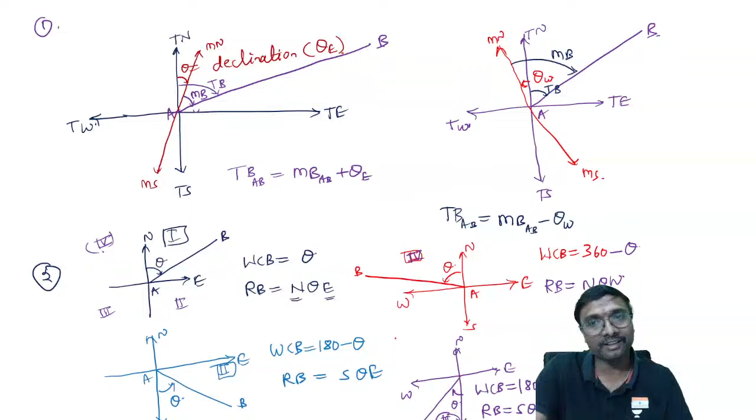So this first class is over already. The missing slides I'll try to add from the video, don't worry. The second class we also did yesterday. If we could have done the first class fully, today we would be doing the live test. Actually, the first class did not happen properly. Chapter 4, leveling, gets over, is it not? So up to that point it gets over, right?

Now we'll be going for which one? Part 3, surveying part 3, you can say. Which chapter? The next chapter, chapter 5, trigonometric leveling, right? Shall I go for this? This is your first slide, let us say. This is trigonometric leveling, if you just observe, right?

So tomorrow at 4:30 p.m., same time, right? Tomorrow at the same time, 4:30 p.m., we'll be doing chapter 5, trigonometric leveling, right? Once this trigonometric leveling is over, we will be having the live test on this, right?

After this survey, shall I go with any other subject, or shall I do all mixed tests continuously up to the end? For survey I'll take one test. After surveying is over, shall I go with another subject's quick revision and live test, or shall I go for all-subjects mixed live tests continuously? Which one should I do?

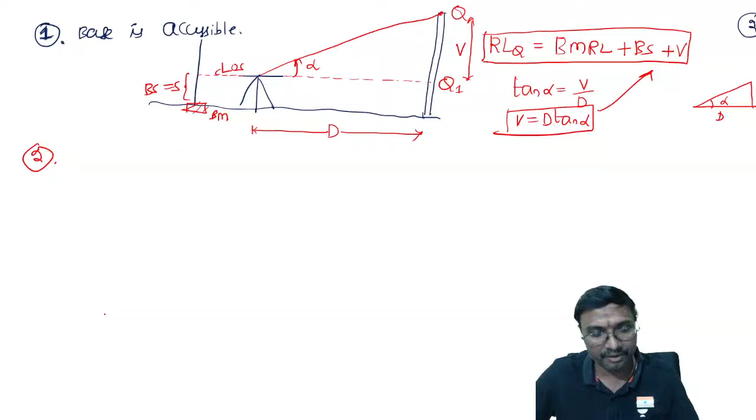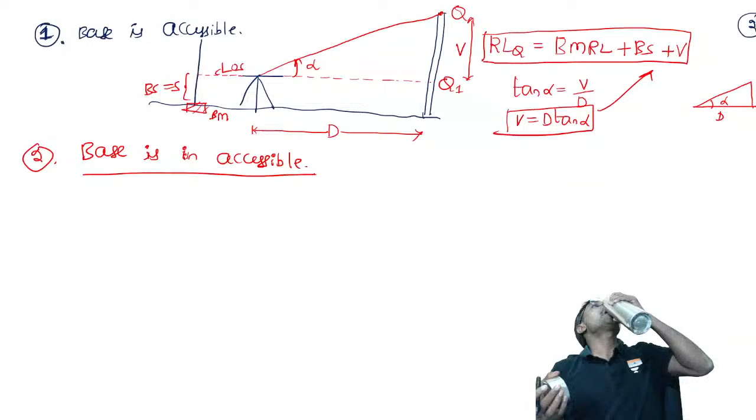That is when base is accessible. So when base is inaccessible, what do we need to do? When base is inaccessible, what is it you have to go for? Under this also there are two conditions. The first: instrument axes are at the same level.

Both instrument axes means the observation axes are at the same level. What is the meaning of instrument axes at the same level? This is your building, or your tower, present at this place. Now this is your Q point. This is your normal ground level.

So can you measure this horizontal distance exactly, or is it impossible? It is impossible to measure this horizontal distance. Now you are having this instrument here. This is the instrument, and this is the horizontal level, or horizontal axis, of this instrument.

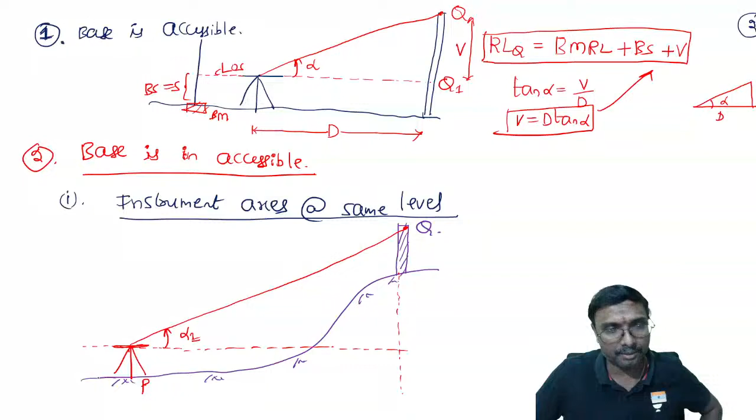So can you get any visibility here? No. But we can observe the top of this building Q. You are getting the angle of elevation alpha 1 from this instrument P. So only one instrument we have to use, or two? Two instruments we have to use.

The next instrument we are keeping here at the same level. So the eye level of this instrument must be the same. Up to this point we will be having alpha 2. This is your A point, and this is your B point.

Now which type of reading will be taken by both on this benchmark? Both will give the same reading, since both lines of sight are at the same level. Only one reading will be available, that is your back sight. Between this instrument and this instrument, we know the distance b. Do you have any problem in measuring this small b?

We don't have any problem in measuring this small b, but this capital D is not possible to measure. That is why we are going for these steps. Okay, this capital D is not possible to measure, you can say, right?

Now coming to this, this is your V, from here to here. This is your V, you can say. This is your Q dash, whatever it is. Is it clear? The diagram is clear, everyone?

Both instrument at P and instrument at Q, the height of this line of sight must be kept at the same elevation. That line of sight must be kept at the same elevation, right? Now shall we move to the next? How will the line of sight be kept at the same elevation?

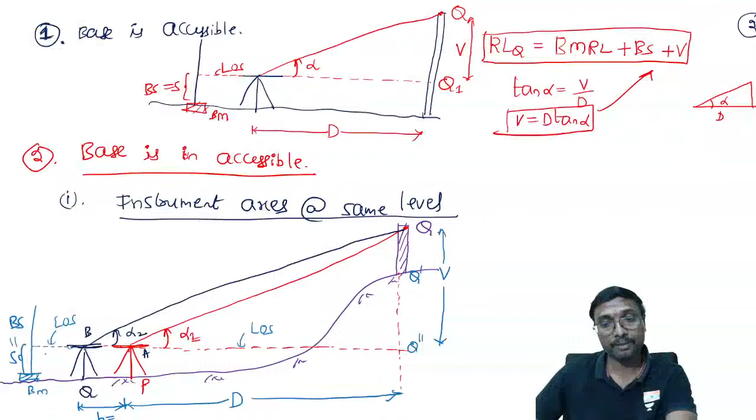The reduced level of Q will be equal to the reduced level of the benchmark plus backsight. Adding these gives the reduced level of the line of sight. From line of sight to the top, the distance is V, so plus this V. That is how you get the reduced level of the top of this tower. Is it clear now, everyone?

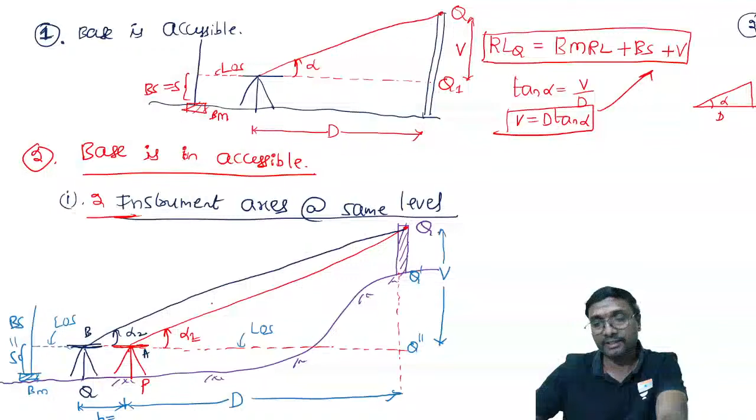Under this base not accessible condition, the two instrument axes are at the same level. Is it clear? Shall I move to the next?

So under this, base inaccessible, first condition, right? Second one, can we go for two instrument axes, right? Two instrument axes at which one? This is same level or different level? Yeah, you form the diagram in a question in the examination accordingly, right? You form the diagram. From the diagram you get it accordingly, right? फटाफट धनाधन diagram draw करके trigonometry principle apply करके solve करना है, right?

That is better, because if you try to remember this formula, you cannot remember this formula. It is very difficult to remember this formula. You can say it is almost impossible to remember this formula. You have to be careful, right?

Two instrument axes at which one? This is a different elevation. This is different levels. Level is nothing but your elevation only. Because all formulas look similar only, right? So there is a possibility that confusion will occur.

Yes, hi Pravalika. Two instrument axes at the different level means, right? This is the one you are having. One second. Just try to erase this.

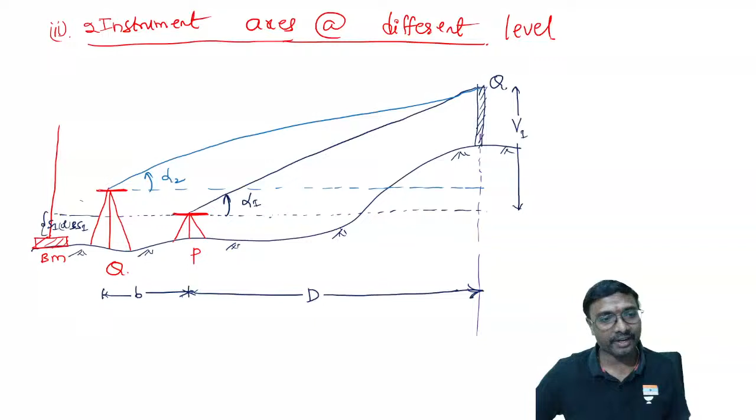Now, similarly, when you are taking this second instrument, this is the line of sight of this second instrument station. If you just observe, this is your alpha 2, you can say. Let us assume it is a straight line, okay? One second.

Let us assume that is a straight line. And what happens up to this point, what is it you are having? This is your backsight 2. This is your S2, or this backsight 2, you can say, right? Now what is this one? This distance will be V2. If you just observe, this is V2, you can say, like that.

Is that clear now, everyone? Is that clear now, all of you?

So can we say this one is X and this is also that X? So now can I say that S2 minus S1 equal to V1 minus V2? Can I say that it is equal to that X or S, whatever it is? Whatever symbol you want to give for this, you can give it, if you just observe. Okay?

So now this S2 minus S1 is nothing but your S only. S you wanted to give the symbol, or X? Yes, will give the S symbol. Okay, that is better. We are habituated to do this. Deepa, good evening. Right. So S will be equal to which one?

This V1 minus this V2, right? What is that V1? If you just observe, V1 is nothing but your D tan alpha 1, minus what is that V2? You can say that is your D plus b, right? What is it you can say? That D plus b.

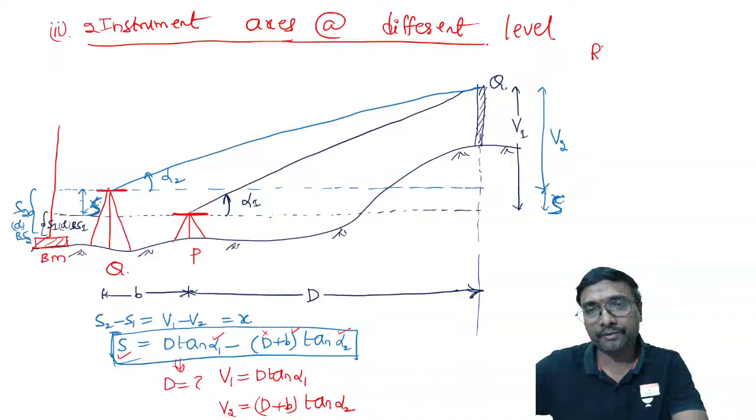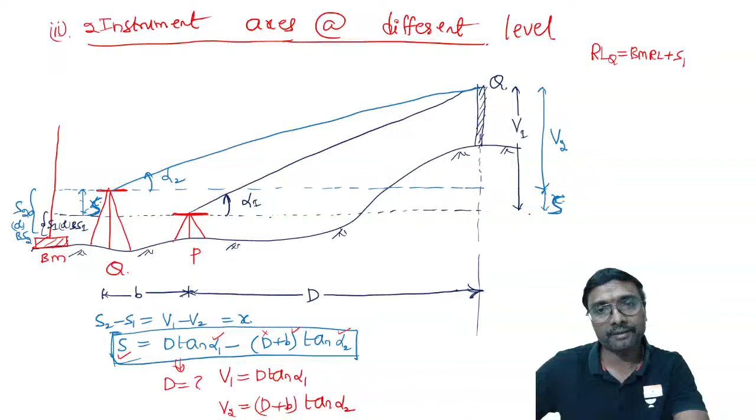Now what is that formula we can use for the reduced level of this Q? This is your benchmark reduced level plus S1, means level of line of sight, plus V1, right? Or we can also calculate it: the reduced level of Q will be equal to benchmark reduced level plus S2 plus V2. Got it now? How to get the reduced level of this top point Q?

So nowadays they started giving you questions from this one also, because everybody is preparing compass survey, chain survey, leveling and like that. In recent years, if you just observe, you find questions from this trigonometric leveling. Is it clear, everyone? So this completes your trigonometric leveling, chapter 5.

Shall I go for the next chapter? That is your chapter 6, traversing and omitted measurements. Traversing and omitted measurements.

Traversing and these omitted measurements, you can say features, right? So maximum how many measurements can we find out? During surveying, suppose we have missed some angle or some line length, or we have measured but forgot to note it. Then how can you get these missing details? Maximum 2 details only we can get. Maximum 2 details, right?

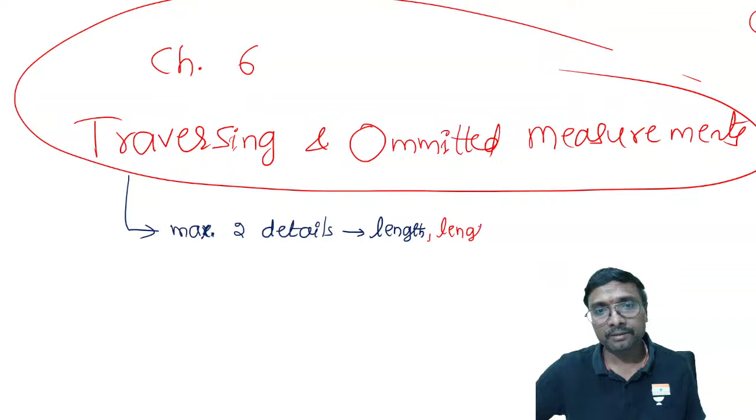So length comma length, length comma bearing, and bearing comma bearing, 2 bearings. Of which one? These are of the same or other sides. Same side 2 properties are not known, length and bearing are not known, or of other sides of the polygon: one side bearing, one side length. Like that combination, you can say features.

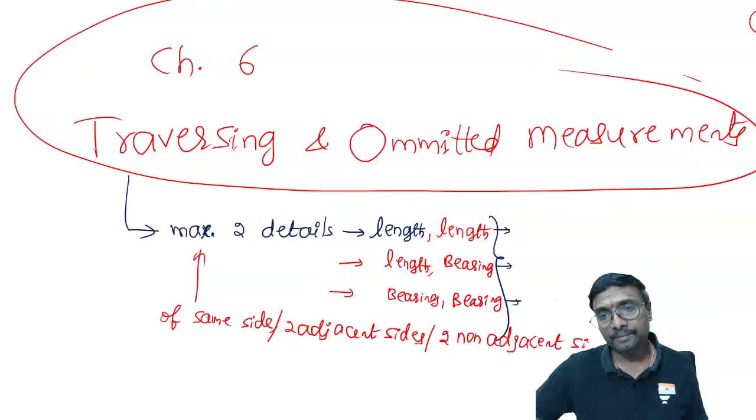Either both parameters correspond to one side, or to adjacent sides, or to non-adjacent sides. It is better I write it in that manner. The maximum 2 details will be of the same side, two adjacent sides, or two non-adjacent sides. Either way you can go for this. Is it clear?

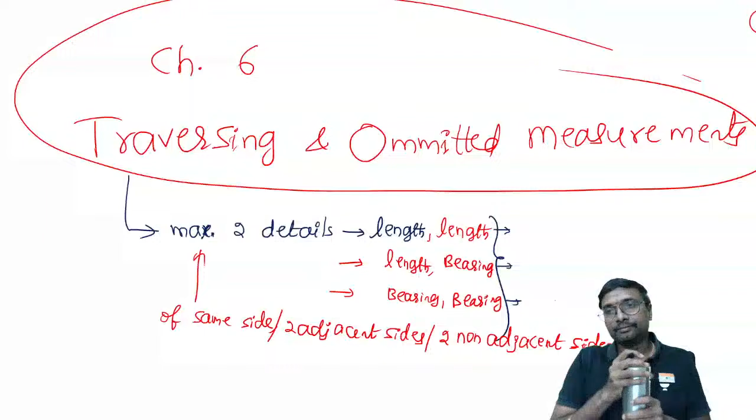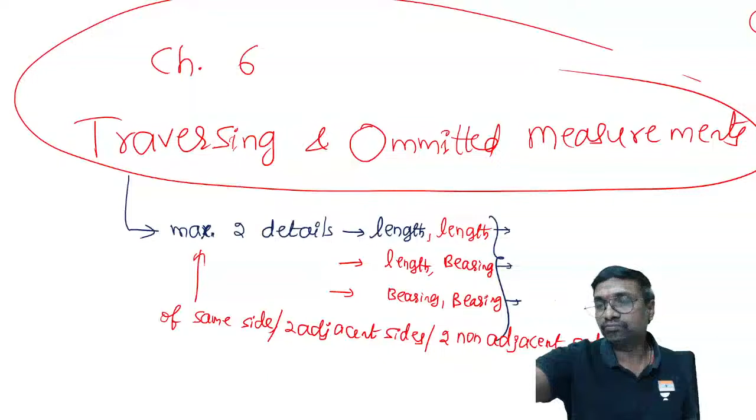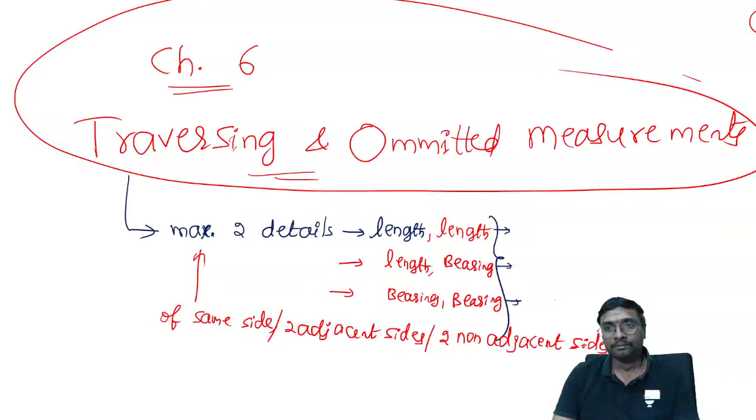Note this and tell me. Clear, everyone? Shall I move? You are not noting, na? I am waiting.

So maximum 2 details can be omitted, and those maximum 2 details we can retrieve for a closed traverse. For a closed traverse, what is the sum of the interior angles? It is (2n minus 4) into 90 degrees. In a habit, I wait while you are writing.

So what is the sum of the exterior angles? It is (2n plus 4) into 90. Here n is the number of sides of the traverse. However many sides are there, you have to consider that many sides. Is it clear? Now, what is the closing error?

Do you remember that? Seriously writing? I'm giving the PDF, don't worry. I'll be sharing the PDF, no need to worry.

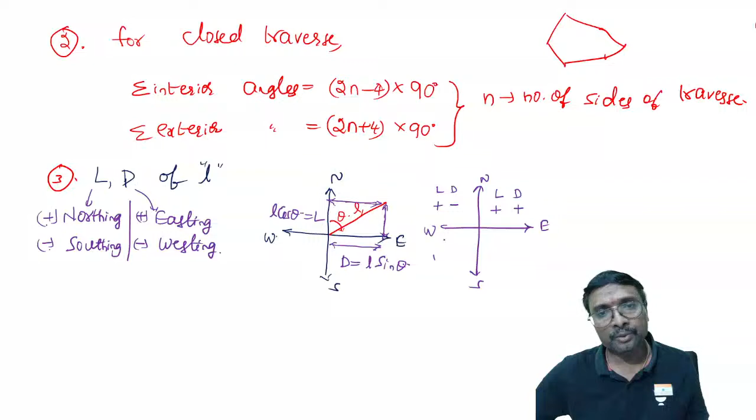Northing, easting: latitude and departure. Northing is nothing but positive latitude, and easting is also positive departure. Here in this north-west quadrant, latitude northing is positive and westing departure is negative. The next one is south-west, so latitude and departure both will be negative.

And here, latitude southing is negative and departure easting is positive. These are the sign conventions we'll be having, right? Now, closing error.

What is a closing error? Whenever a traverse is there, suppose you start from A, go to B, C, and D. Then when you join again, it is not joining to the original A. It ends at A1. So it will have an error, since it is not joining the original point. This is the error.

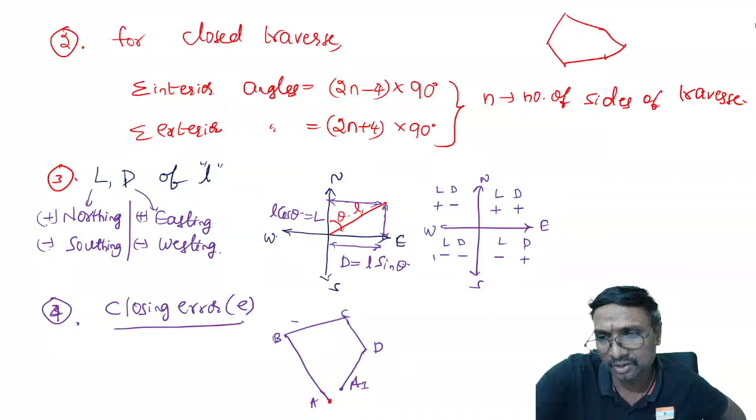Yes, we need to take the quadrantal bearings. Quadrantals, anti-clockwise you have to take it.

So here, this is your sum of departures, and this is your sum of latitudes. And this is your closing error, A to A1. So the closing error E will be equal to the square root of sum of latitudes whole square plus sum of departures whole square.

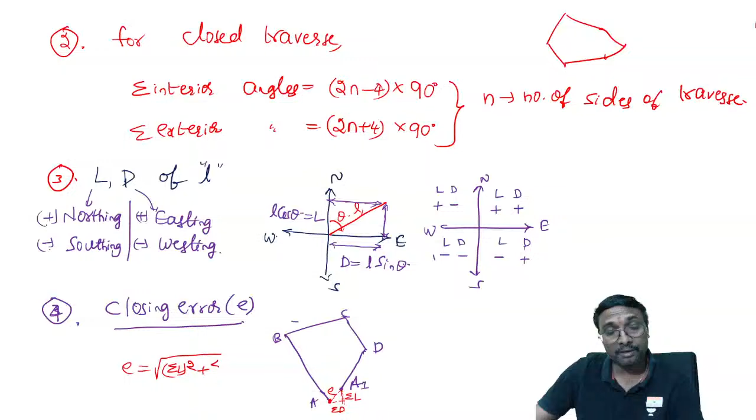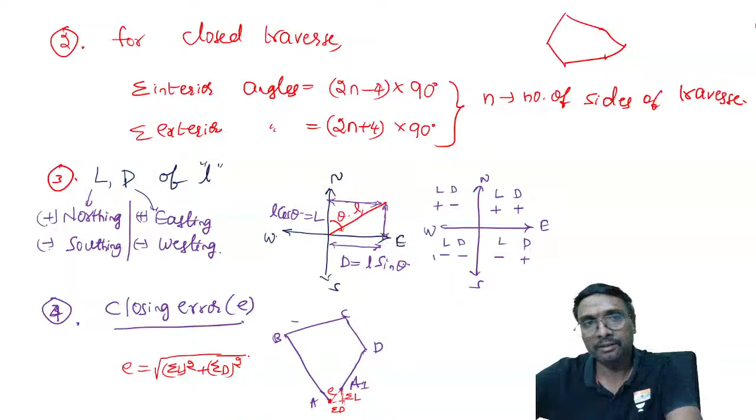That is your closing error, you can say, right? So closing error means close the traverse only. Note this. So shall I move to the next then? If the sum of these latitudes is equal to 0 and the sum of these departures is equal to 0, will there be any error or no error? No error will be there, if you just observe.

So now, what is the bearing of this closing error? Bearing of this closing error, tan theta will be equal to which one? This is the sum of the departures by the sum of the latitudes. Bearing of this closing error is nothing but the sum of the departures by the sum of the latitudes, right?

So now, what else will we have? Relative error of closure. What is the relative error of closure? Relative error of closure is equal to E by P. What is P? The closing error divided by P, and P is nothing but the perimeter of this closed traverse. Perimeter of this closed traverse, right? Okay.

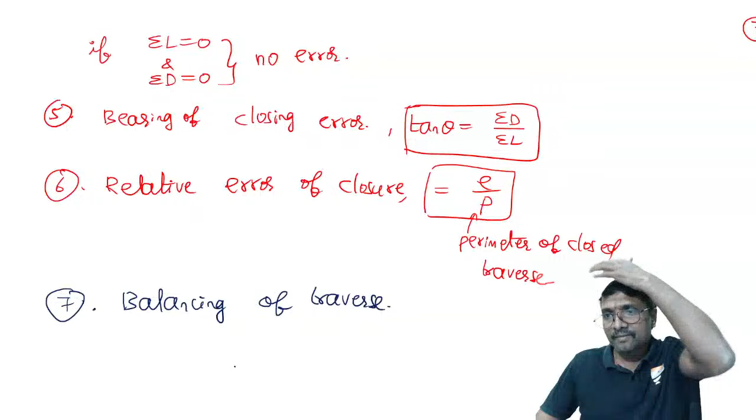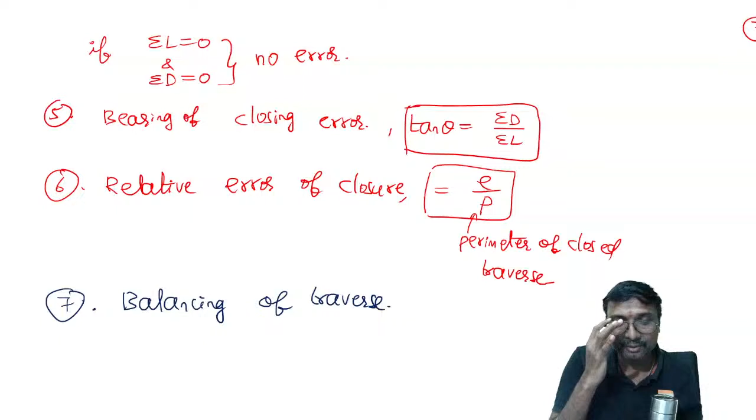Now, what is balancing of the traverse? How can you do balancing of the traverse? There are many methods, everyone. What are the different methods we have? Tell me. Bowditch's rule will be there, axis method will be there, transit rule will be there, graphical rule will be there, and all these things. Many methods are there, so we'll see one by one. One second.

Balancing of the traverse. Okay, I'll write it in the next slide. Under this, the first and foremost one is Bowditch's rule. Bowditch's rule, or you can also call it with which name? Compass rule. Bowditch's rule or compass rule, you can say.

Correction for latitude of any line is equal to total correction, minus the sum of the latitudes. So let us say sigma L is the error in total latitudes. Sigma D is the error in total departure, okay?

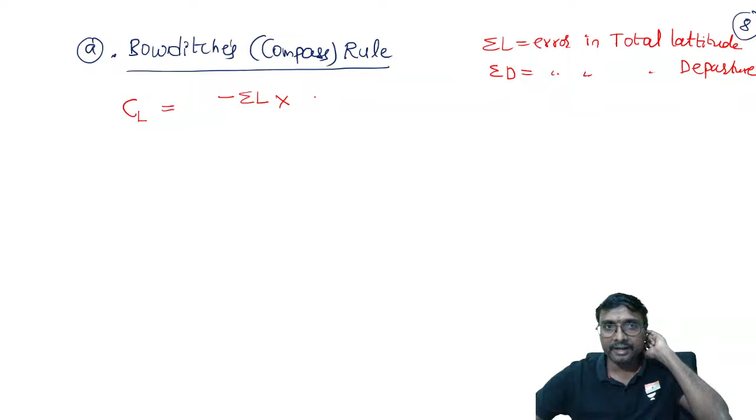So correction means we'll be applying it in the opposite manner. Minus sigma L into the length of this side, divided by the perimeter of the traverse.

So correction for departure you can do in the same manner. Departure error is sigma D, so correction will be minus sigma D into the length of that side, similarly divided by the perimeter. Okay. This is your Bowditch's rule, right?

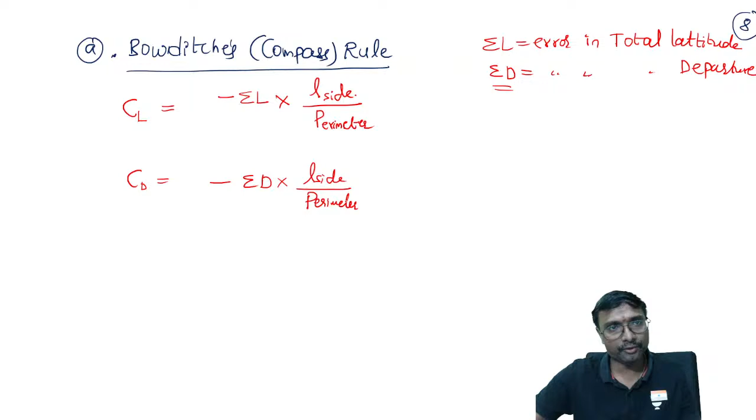What is the second one? Transit rule. What is the transit rule? You remember what the transit rule will be? What is the transit rule, everyone? Correction for latitude is equal to total correction required, sigma L, into the latitude of that line divided by which one?

Latitude of this line divided by which one? What is that you can say? Tell me. Latitude of this line divided by the arithmetic sum of the latitudes. Arithmetic sum means it is just a number only.

Arithmetic sum of the latitudes. Okay, right. So what can you say? Correction for latitude is minus sigma L, the sum of the latitudes, into the latitude of this particular line, divided by sigma of the mod latitudes, right? Mod latitudes means, do you need to consider the positive or negative sign, or only the value? We have to consider only the value. So that is the correction for this latitude.

Do we need to consider the positive and negative signs, or only the value? We have to consider only the value. Is that clear now? Similarly, correction for departure, how can you get that? Only magnitude. Correction for departure is equal to minus sigma D, the total error in the departure, into the departure of this particular line, divided by sigma of mod departures. Mod departure means we don't consider positive or negative values, only the magnitude.

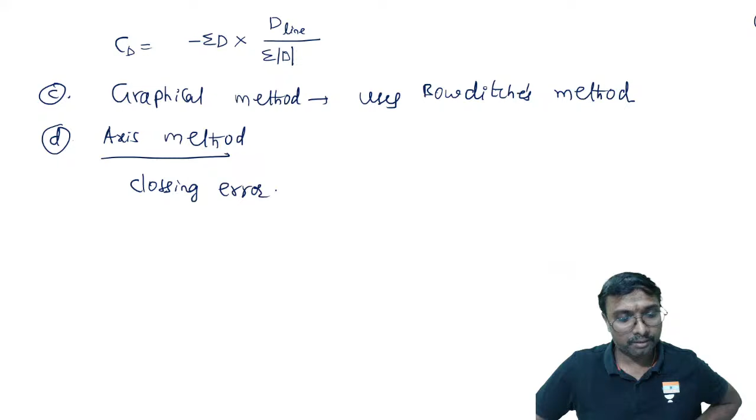Right, this graphical method, if you observe, what does it use? It uses the Bowditch method only, so it is a Bowditch graphical method, like that. Next one is the axis method. In the axis method, the correction is equal to closing error into length of side by length of axis. Okay.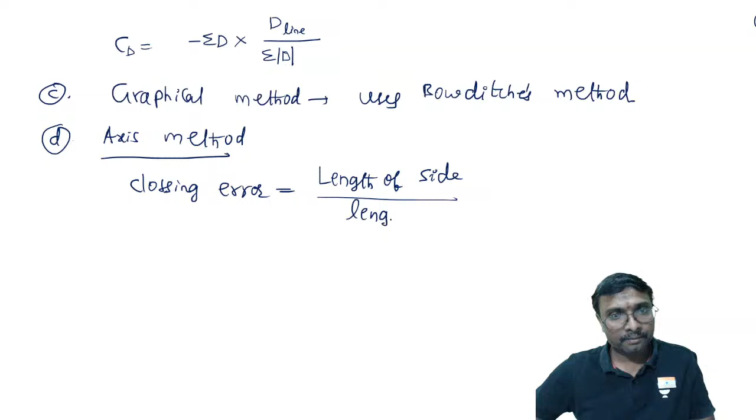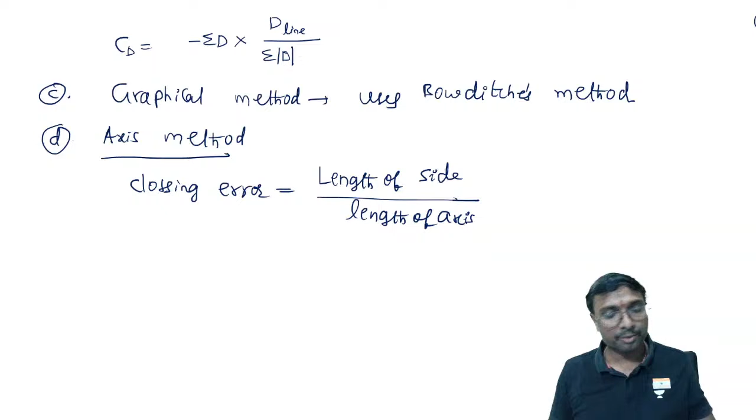Length of side by length of axis. Is that clear now, everyone? So omitted measurements, how can you find them out? Sum of the latitudes equal to 0 and sum of the departures equal to 0. Then you will be getting these omitted measurements, right?

So now, the transit rule. Which measurements are more precise? It is used when angular measurements are more precise than linear. Bowditch rule, which one is more precise? In the Bowditch rule, the angular and linear measurements are both of equal precision.

Angular and linear are of equal precision or not? These two are of equal precision. Is it clear, all of you? Now what will we have in this Bowditch method, if you observe?

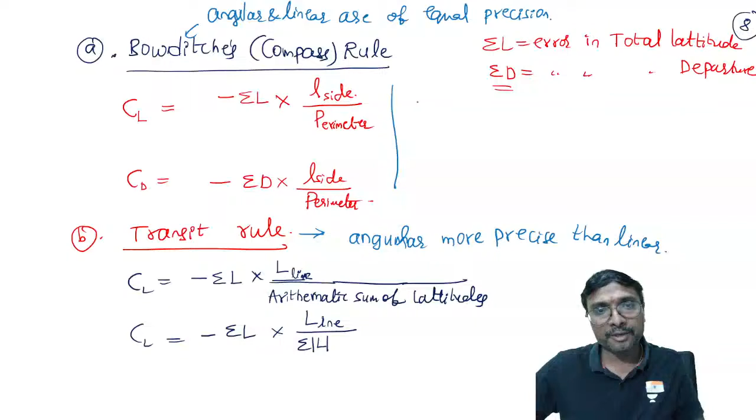Error in the linear measurements is directly proportional to the square root of length. Now, error in the angular measurements, how are they related? Error in angular measurements is inversely proportional to the square root of the length. Is it clear, everyone? This is about your omitted measurements.

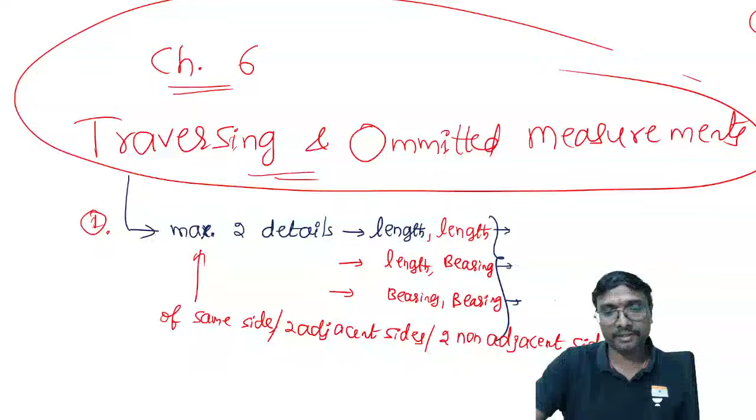Next, this was chapter 6, it is done. Now we go to chapter 7, contouring. Contour gradient: does anyone remember the contour gradient formula? A contour is the line joining points of equal elevation. Contour gradient is equal to contour interval by the horizontal equivalent.

Contour interval by this horizontal equivalent, you can say, right? Similarly, what is the horizontal equivalent? Horizontal equivalent is nothing but your length. Horizontal equivalent will be equal to the contour interval by this contour gradient, you can say. You can get it like this, right?

Next, the radius of the arc required. What is the radius of this arc required to obtain the route path? Radius of arc required for which purpose? To get this route path. What is the radius of this arc required, if you just observe? That is your horizontal equivalent, or this length divided by this is RF. That is your scale in RF, you can say, right?

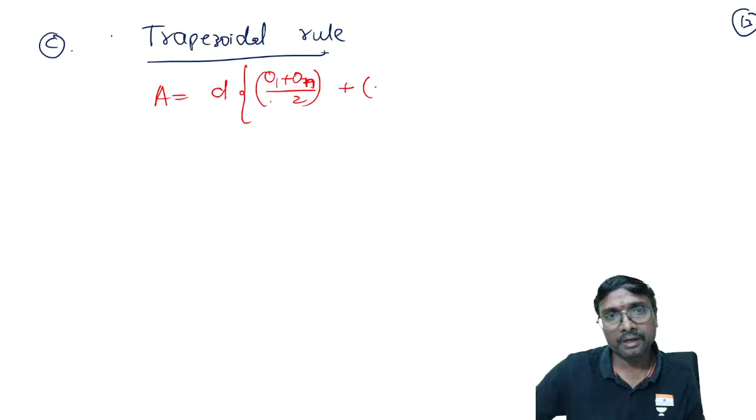Next one, trapezoidal rule. What is the formula? A equals small d into O1 plus On by 2, first plus last by 2, plus O2 plus O3 plus so on up to On minus 1. First plus last by 2 plus the remaining, right?

Next, the fourth one is Simpson's rule. What is Simpson's rule, everyone? A will be equal to d by 3, the common interval by 3, into first plus last, O1 plus On, plus 4 into the even ordinates, O2 plus O4 plus O6 and so on, plus 2 into the odd ordinates, O3 plus O5 and so on. Like that, all ordinates come into the picture. Is that clear?

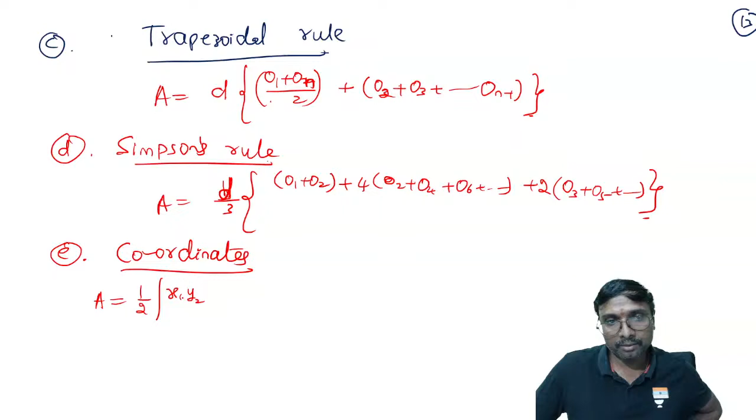Area from coordinates, right? How can you get this area from these coordinates? If you just observe, area equals half into x1 y2 minus y1 x2, plus x2 y3 minus y2 x3, plus x3 y4 minus x4 y3, plus so on, right? Xn yn minus 1 minus yn xn minus 1, right? Like that you will be having this area.

So different coordinates are known to us. This is your A, let us say x1 comma y1; this is your B, x2 comma y2; this is your C, x3 comma y3; this is your D, x4 comma y4; this is your E, x5 comma y5. Not that y5 which you are using; this is the y coordinate of this fifth point. That is the meaning of it. Okay, clear everyone?

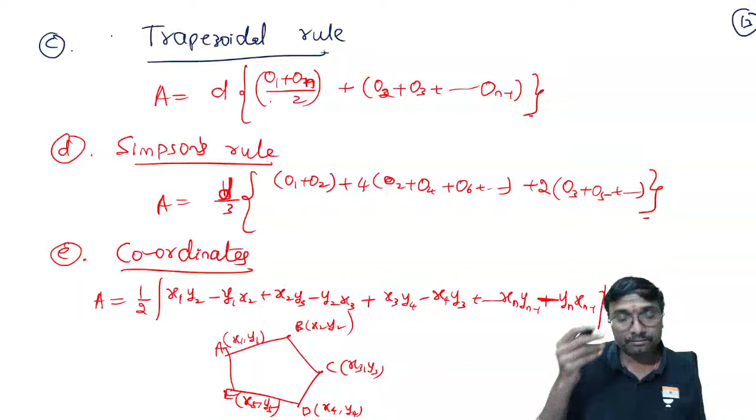This is how you will be getting these areas, right? Is that clear everyone? Now, shall we go on to the next one? Irregular boundaries areas calculation, this third point. This is the 13th, 14th one. Now, shall we go for this fourth point? If you just observe, volume calculations.

What is the volume? The first and foremost one is cross section. So whenever it is a cross section, if you just observe, volume is equal to length into that cross section area. Length into that cross section area, right? How can you get these areas of cross section, everyone?

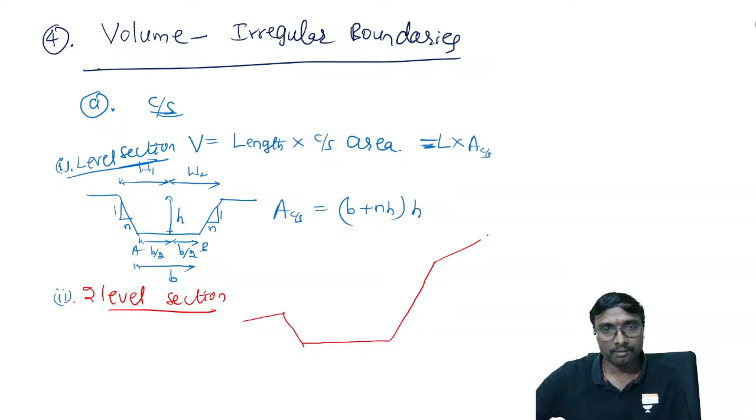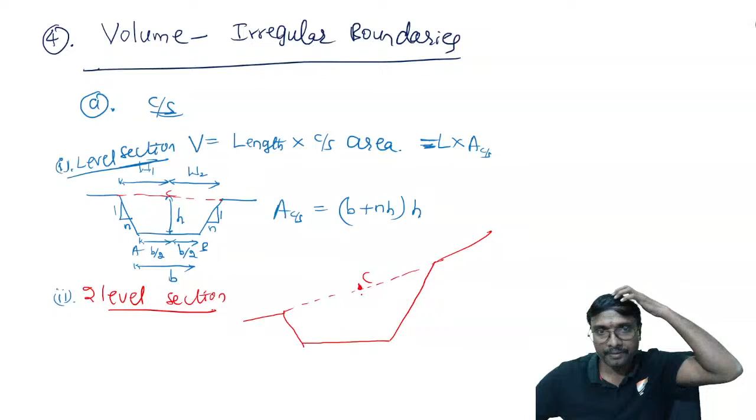So whenever it is a two level section, if you just observe, it is in this manner. This is the original continuation. This is your central point C. The height exactly at this center is h. This is b by 2 and this is b by 2. This slope is 1 in m, but the side slopes are maintained the same, 1 in n only. The original ground slope was 1 in m, right?

Then forgot all concepts. Yeah, that's why I'm revising.

What is the area of this cross section? This is your w1? Sir, this is your w2. What is this? This is your w1. What is the area of this cross section? 1 by 2n into, what is it? B by 2 plus nh, into w1 plus w2 minus b square by 2. Okay, like that we have, right?

We don't know exactly, they may come, we have to wait. But I think election notification already came. If election notification already came, we may not expect any new things. Next month? We may expect, right? Let us hope.

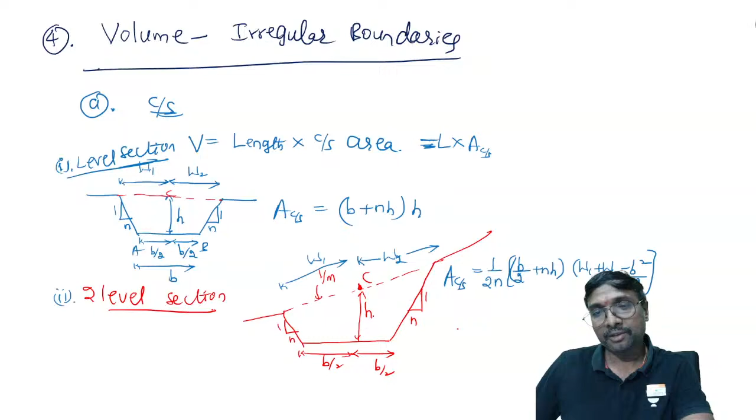Prismoidal correction, if you just observe. So what is the prismoidal correction? Cp will be equal to the volume obtained by the end area method minus the volume obtained by the prismoidal method. That is the correction. How can you get that? It is d into n by 6 into (h1 minus h2) whole square, and that is negative. Cp is negative.

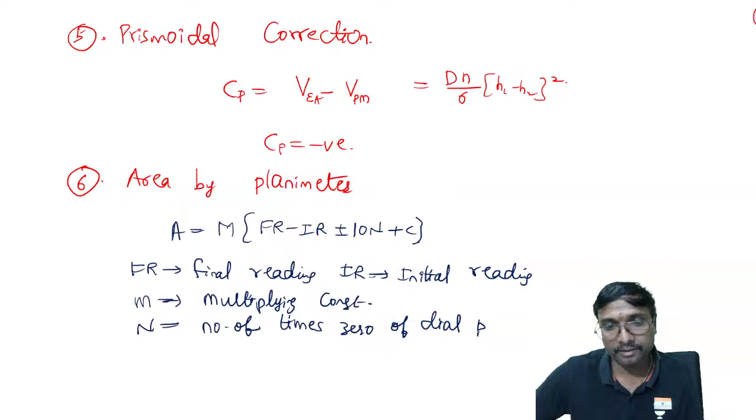So what is FR? FR is nothing but your final reading. IR is nothing but your initial reading. And m is nothing but your multiplying constant. And what is N? Number of cycles, or you can say the number of times the zero of the dial passes the index mark, means how many cycles.

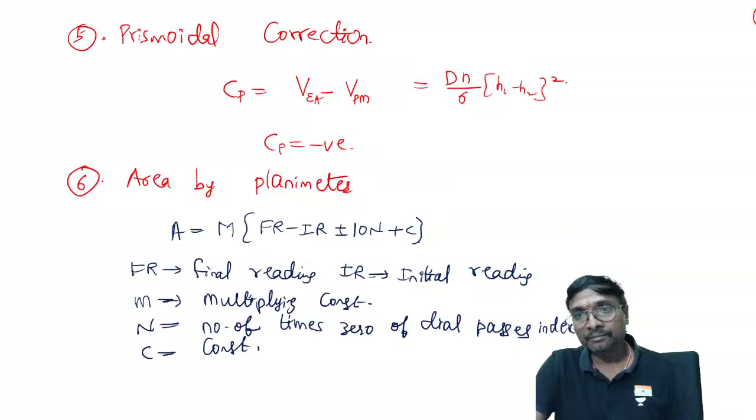There will be some index mark shown on it. What is C? C is the constant of the planimeter. It is given in the manual of the planimeter. Is it clear, everyone?

How many topics are we left with? We are left with tacheometry, horizontal and vertical curves, and aerial photogrammetry. These three topics we are left with.